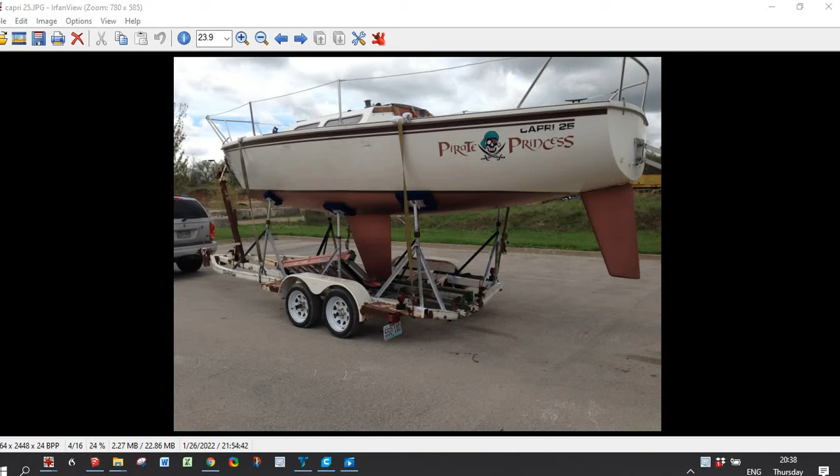This is a short video showing how we repaired the rudder post on a Capri 25 sailboat. This isn't actually the boat we worked on, but one like it.

I think the construction is similar between this and a lot of boats, where there's a stainless steel tube that extends out the top of the rudder and goes through a tube that's fiberglassed inside the boat, acting as a bearing. There's not really bearings inside of it, so it's just stainless steel acting on fiberglass. And in time that wears and this gets sloppy.

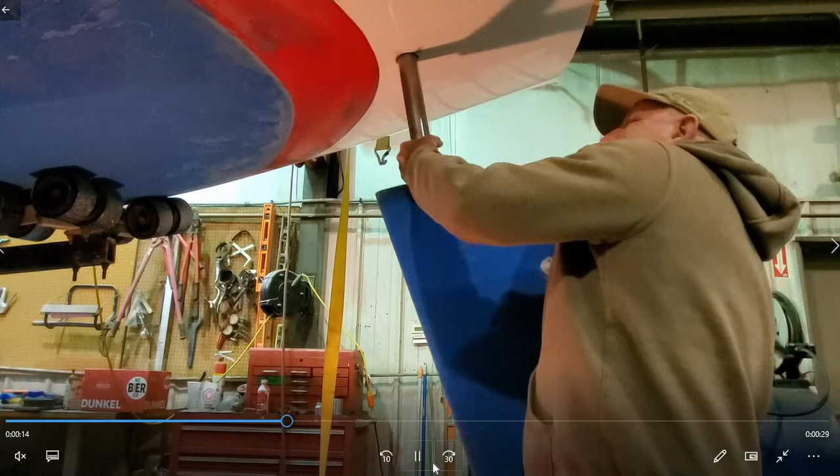This shows what it looked like before we did the repair, after years of use. You can see how much movement there is in the rudder, and it wiggles both fore and aft and port and starboard.

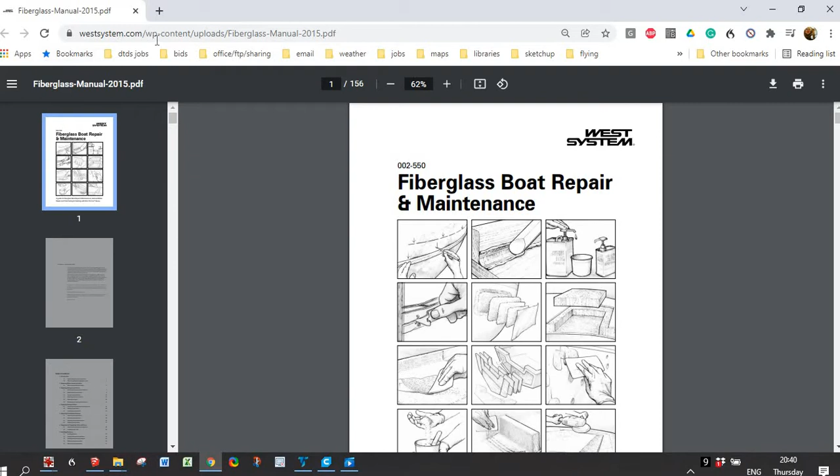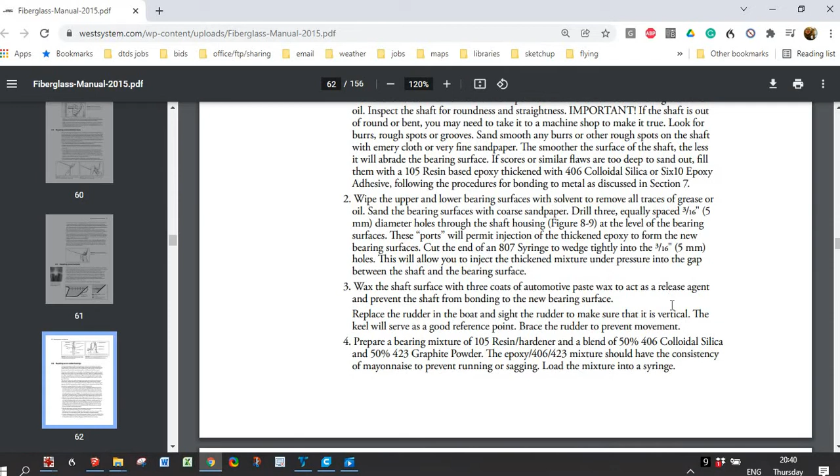The West System has a very good guide, a repair manual that you can find online easily, and I looked to see if they addressed this, and of course they did. What they recommended was that you wax the outside of the rudder post with 3 coats of automotive wax to act as a release agent, and you mix up some epoxy with 50% colloidal silica and 50% graphite powder to reconstruct the bearing.

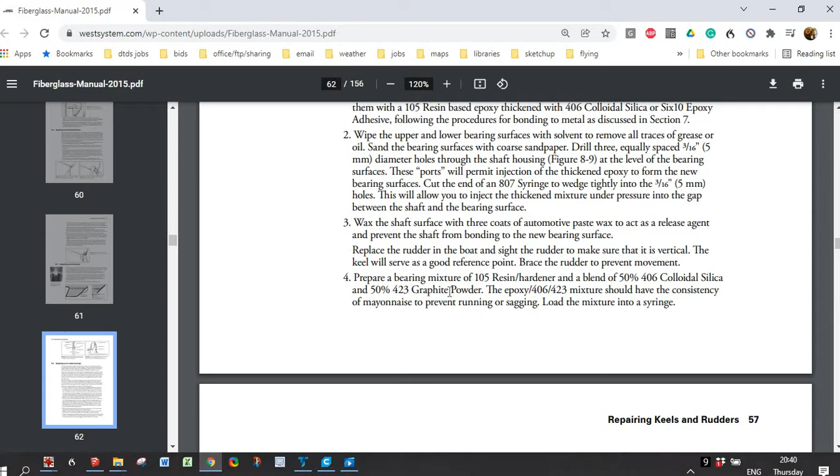Then you load that into a syringe, and that's injected in 3 points around the outside of this, both top and bottom. They said to make like a 3/4 inch diameter disc.

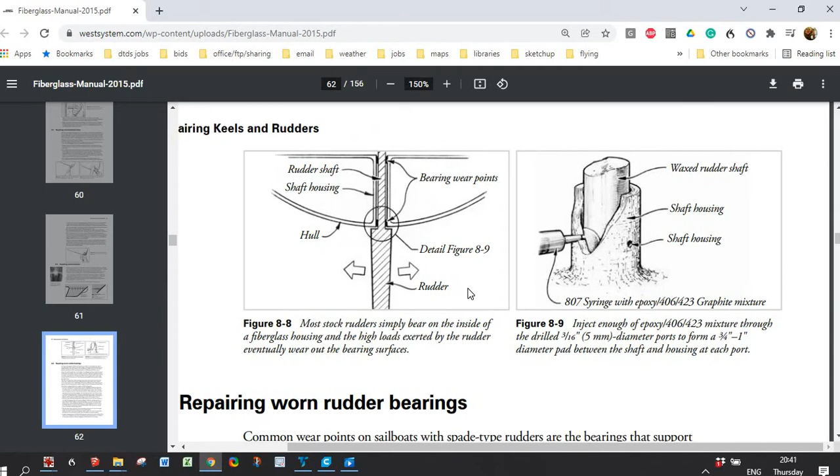This shows the holes that you drill and shows where you construct the bearing. Afterwards, they say you should be able to break the shaft free by grasping the rudder and twisting it. And if it's too tight, then you add some buffing compound to loosen it up again.

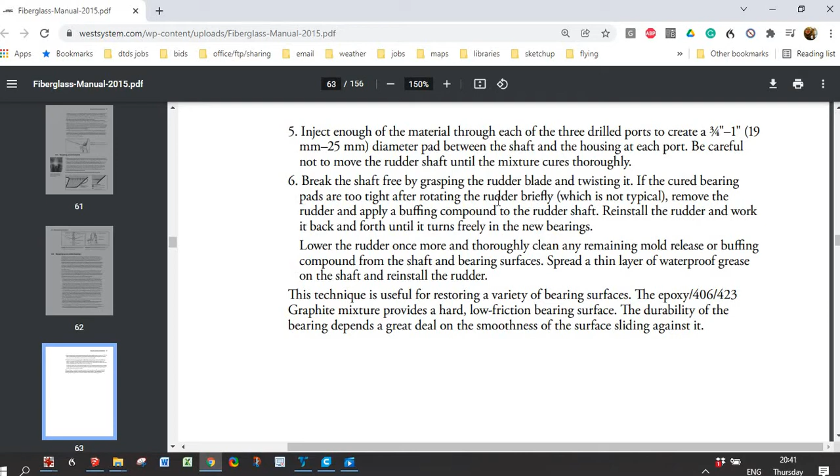Well, I didn't really like this concept. I didn't want there to be a risk of actually gluing the rudder into the boat. And also the access to that tube inside the boat is pretty limited.

What I really wanted to do was to machine some bearings that slipped over top and bottom, made out of Nylatron, and then oversize the hole in this tube to insert that bearing. But there was just not enough thickness to work with.

So as an alternative, I came up with a concept to make a mold out of 3D printed parts that I felt like I could break away easily and get out after the epoxy was injected.

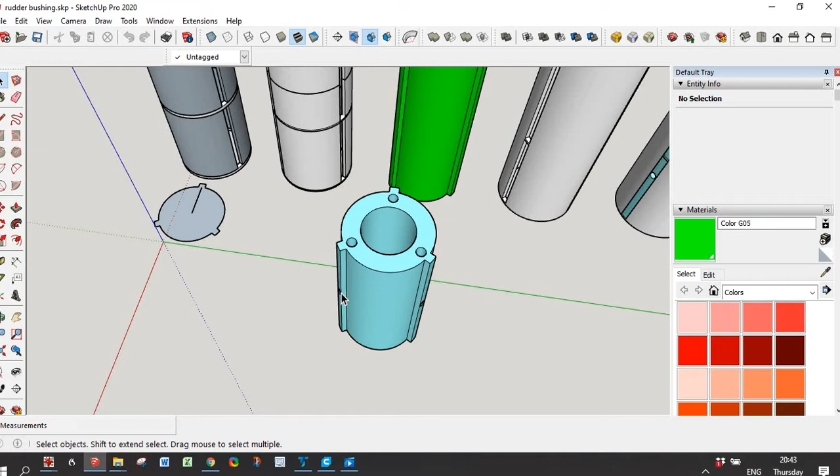The way this worked was I had a top and bottom plug, and in each of the top and bottom plugs there were holes that connected from the ends to ports out the side in 3 places. That then inserted inside of 3 leafs that went on the outside that actually controlled the outside diameter.

There was one of these top and bottom, and then it took a center plug, and that's the green part, to go in the middle to make up the difference dimensionally.

When I made this, I made the outside diameter to exactly match the outside of the rudder post, thinking that I didn't want it to be too loose, and if it was too tight, I could use a sander and enlarge it a little bit, but I'd have to do the whole process again if it was too loose.

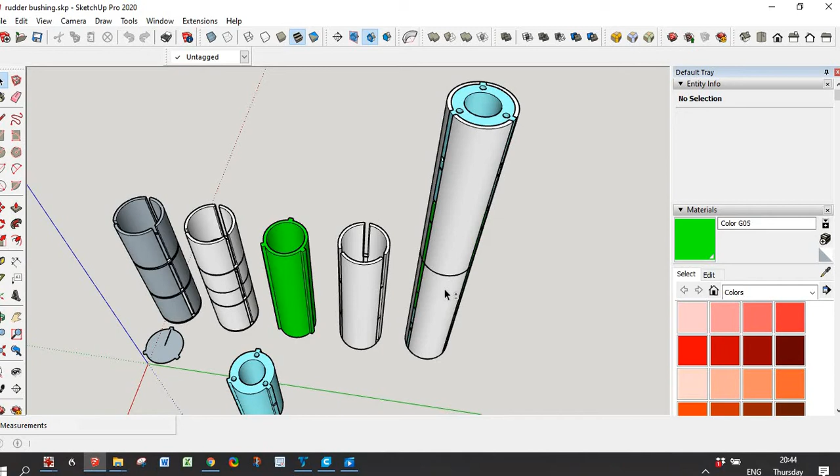Although this looks a bit complicated, it's really not. There's a lot of people that do 3D printing now, and it wouldn't be hard to find someone to draw this up and make it for you. The 3D printers are relatively inexpensive, and there's just a lot of people doing it.

So here are the 3D parts being assembled. As you can see, there's quite a few pieces to it.

Before I put this together, I sprayed everything with a mold release. I did go ahead and print some grooves in it to install O-rings, thinking that would help hold it together, and when I slipped it up inside the boat, it would act like a seal to control where the epoxy went. But in reality, it wouldn't slide up inside the boat.

It was too tight, so I ended up leaving the O-rings off and just using a piece of tape. I did put a spot of caulking on each one of those to hold everything tight together, and then taped it tight until the caulking cured. So it made kind of a glued together piece.

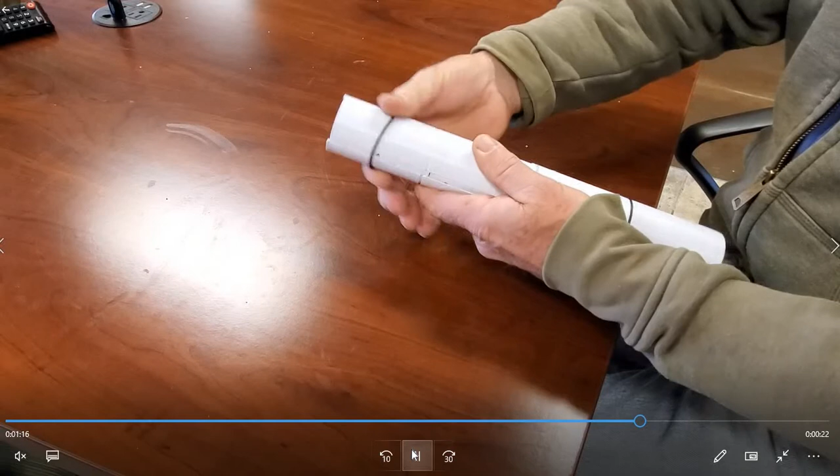So here it is all assembled. You can see the ports on the ends that connect with the holes on the side, on both ends.

I tried different mold releases to see which would work best. I made up a little sample to do a bench test and tried automotive wax, Vaseline, and this Stoner urethane release. All three worked, and the Vaseline worked the best. I was concerned about using it on the outside of the part though, because as I slid it up inside the boat, I didn't want any of the Vaseline to wipe off onto the surface I was trying to adhere to.

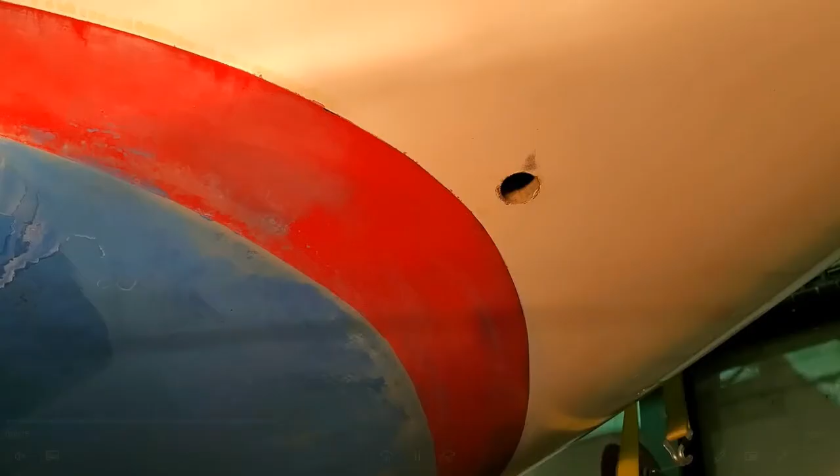So here's all assembled. As I said, I put a spot of caulking between the leaves to hold it all together so it fit tight. And there it is inserted into the boat.

And these are the two additives that West System recommended. This is a colloidal silica, which is a white, lightweight powder, and then the graphite powder.

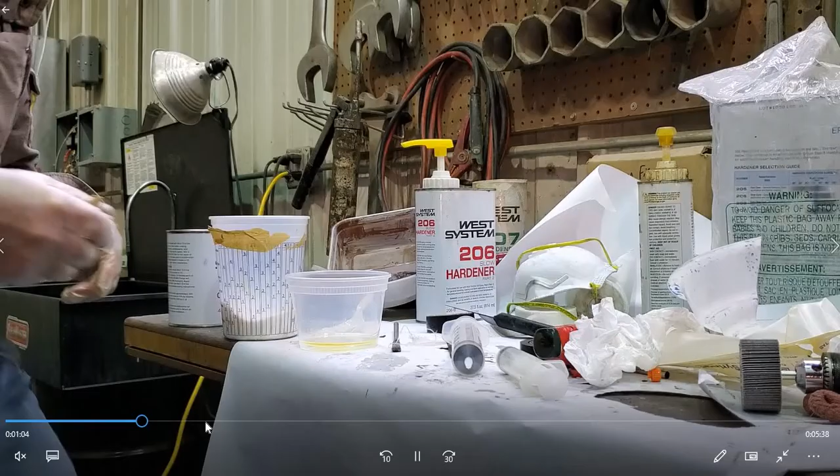West System has a relatively simple metering system to proportion the epoxy resin. There's a calibrated pump in both the resin and the hardener, one pump of each, and you get the right ratio, I think it's 5-to-1. They recommended adding the colloidal silica and graphite in equal volumes.

So I just used a plastic spoon, put in a spoon of each, and kept stirring until I got the consistency I wanted. With these additives that go with the West System, it's amazing how much you can put in. They've got half a dozen different additives depending on what you want to achieve, with colloidal silica being the strongest.

So we'll fast forward through the mixing here a little bit. I just kept adding a little at a time until I got it to the thickness I wanted—thick enough that it wouldn't drip out around the edges, but thin enough to be able to inject through the syringe.

In my practice, I paid attention to how much volume I used, and it took about 15 milliliters to fill one of the ends. So I needed a total of 30 milliliters to do both the top and the bottom. I just wanted some idea of how much volume was necessary.

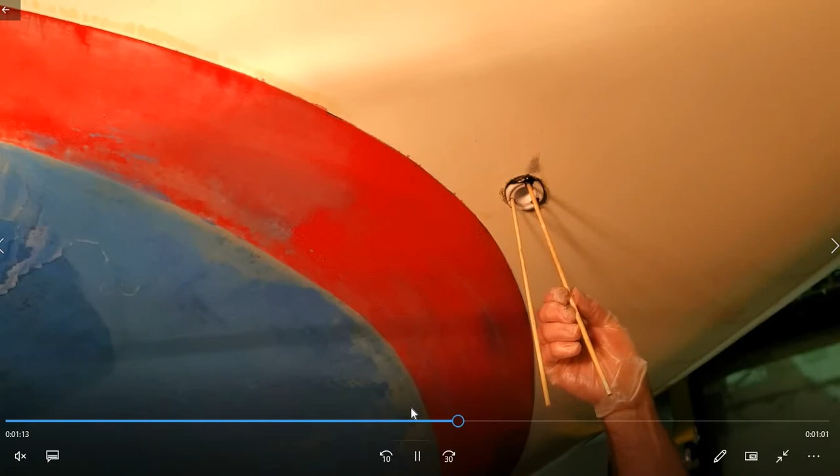After letting it sit overnight, I drove the center plugs out. I reached up through the center and used a punch to push out the top one and the bottom one. The top one came out much easier than the bottom one—I'm not sure why, but they both came out. You can see relatively little epoxy got on between the plug and the leaves.

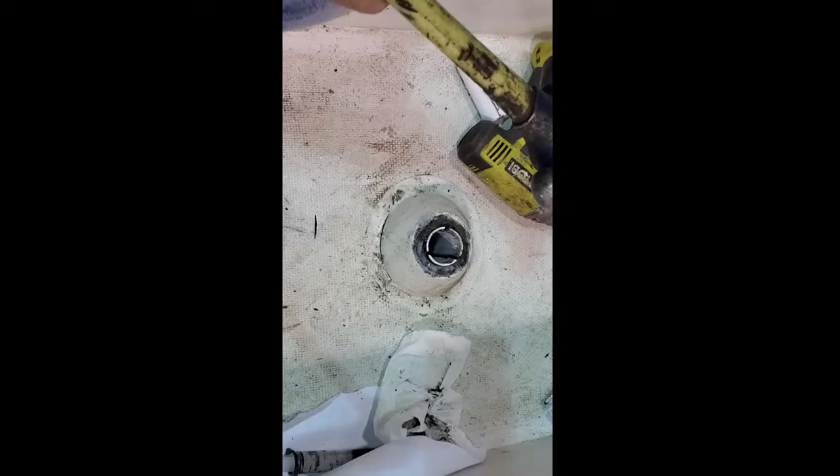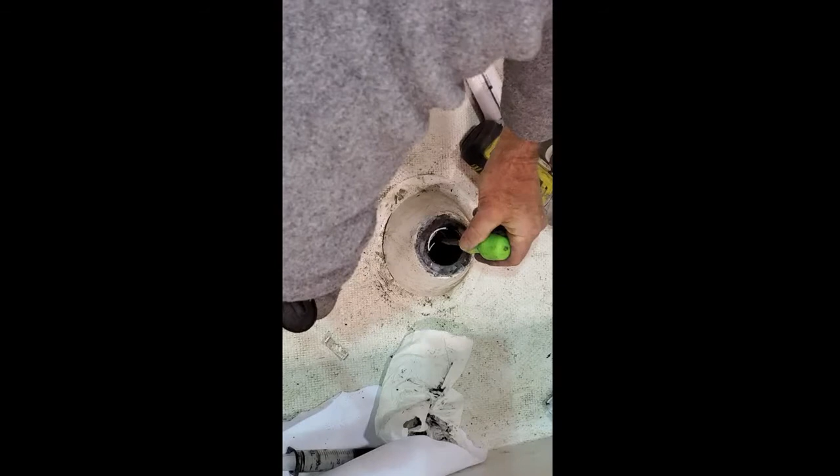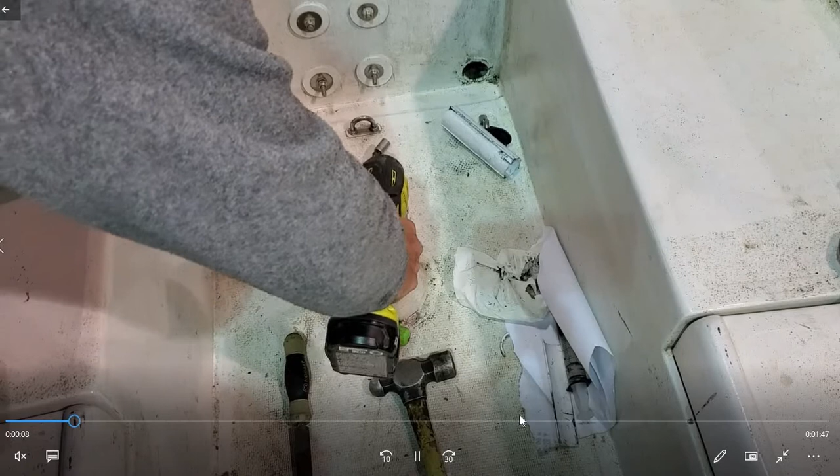After we got done, there was a little bit of lip where all the leaves came together at each joint—I wasn't able to get a picture of it. To take those ridges out, I found a little flap disc sander that would go down inside, and ran it up and down a couple of times just to get the ridges out. But it didn't take much.

Because this has graphite in it, it made sort of a mess—it's like pencil lead. So it was necessary to wipe up all the dust and clean it up with acetone.

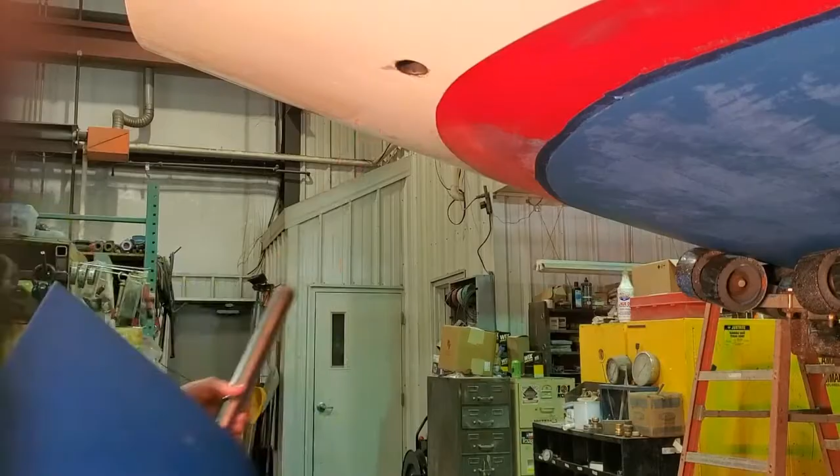I sanded both the top and the bottom and then inserted the rudder, and you can see it fits quite nicely now. The joint's rigid and the rudder moves freely.

So I hope this helps. Feel free to copy it.